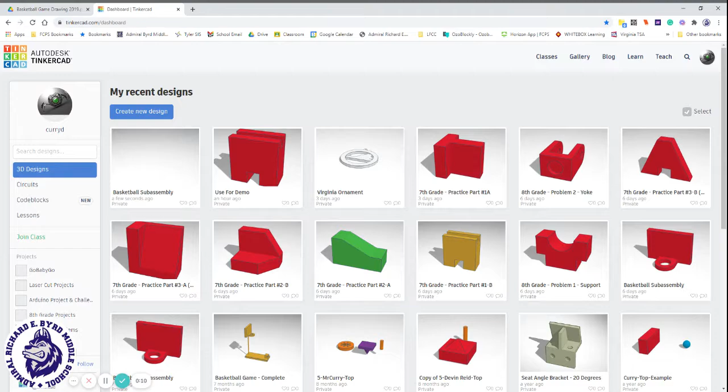Hi folks, what we're going to be designing here today is the top half of the basketball game, just to help you learn how to use Tinkercad and build those skills up for projects that we're going to be doing.

First of all, make sure you're logged into Tinkercad and that you've already joined the class by this point. If not, talk to your teacher.

We're going to create a new design. Click that. When this opens up, it's going to have some crazy name, and what we want to do is change that name. I would do that every time you first go in, and call it something logical about what you're actually making. So we're making a basketball subassembly, I'm going to call it basketball subassembly, and click out in no man's land and it'll take that. That's one of a few things I'd recommend doing every time you're just getting started.

The second thing would be, this is in millimeters, in metric. I want to change this to inches. So I'm going to go to Edit Grid, change this down to inches, and update the grid.

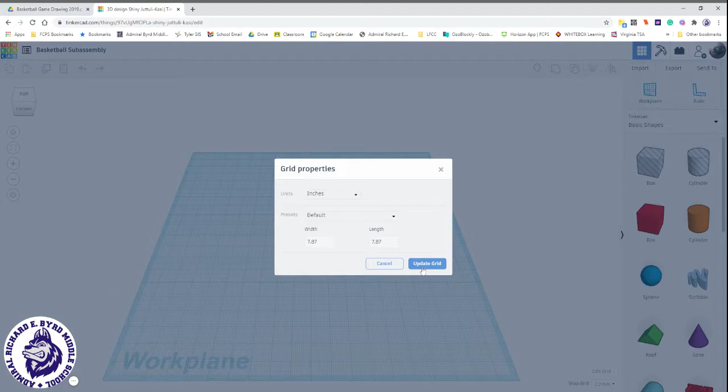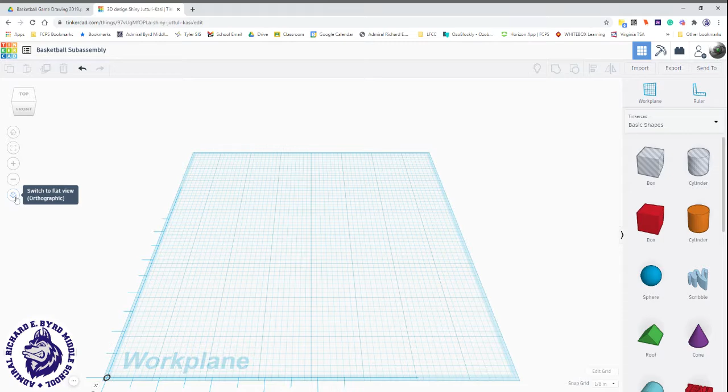Two other things I would recommend here. Ruler, top right corner - I'm going to take a ruler and drop it on the corner of my work plane. And the last thing, this bottom button in the row, is switch to flat view or orthographic view. Click on that. Here in a bit you'll see why that is going to be beneficial to us, but I would honestly recommend doing that anytime you're in there.

So now we're going to go ahead and actually start drawing. Let's take a quick look at the drawing. What we're going to do is draw the backboard and the hoop, and at the moment I like to start with the backboard, so there's only a few things we need to know. When we make this, our dimensions are going to be 3/4 by 4 by 5 3/4.

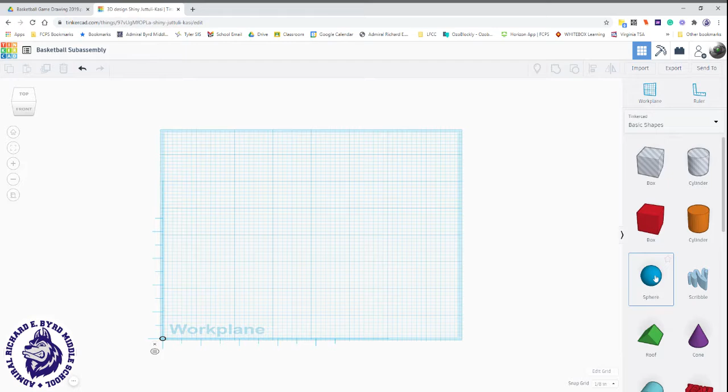So we'll want to set it up that way. I'm going to jump back to my basketball subassembly. That backboard is nothing more than a box, so from these primitives here, basic shapes, I'm going to drag out a box. And because I have the ruler here, I can see my dimensions.

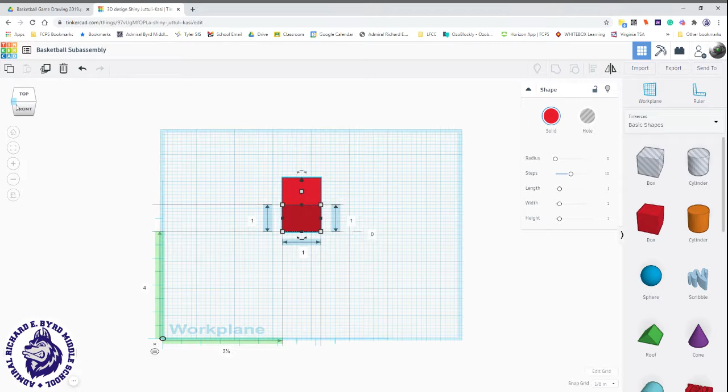Now, it's kind of hard to tell - I can tell the length across the front easily, but it's hard to tell which of these is height and which is depth. Here's a simple solution: I'm going to go to my view cube and click on the top left corner. The reason I'm going top left is, well, one second, I'll show you - if I go top left, I can see all three dimensions easily, and tell which one's height, which one's depth, and which one's my length. If I were to go to the top right corner, this is partially covered up.

So that's the only reason I'm doing the top left corner here. Sometimes, depending on how you're zoomed in, your screen size, and those type of things, you might not see dimensions in the exact order that I have mine. So please watch very carefully where those arrows - the extension lines and dimension lines - are pointing to.

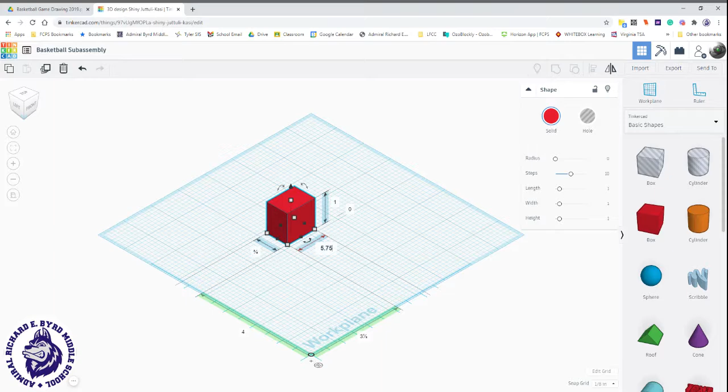First of all, our depth is 3/4. Tinkercad will not accept a fraction, so I have to go decimal - I'm going to do 0.75 and hit enter to accept it. Our length was 5 3/4, so 5.75, and enter to accept it. Now this is sliding off the screen - I can just grab it and drag it over, or use the arrow keys to move that over.

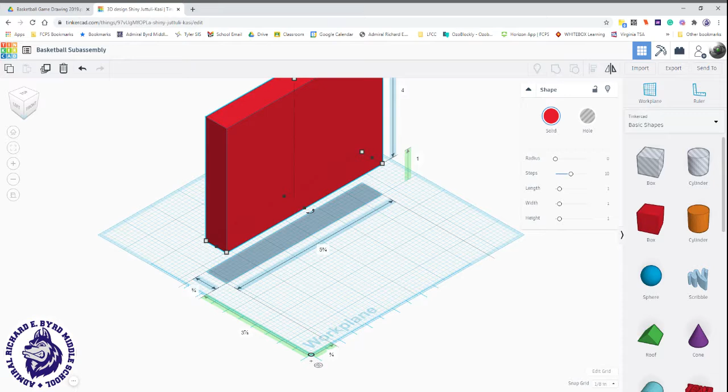And then our height - our height here is going to be 4, so just plain old 4, enter. And this 0, we don't want to do anything with that, but just to show you what it does, that will move me off of my work plane. And if something ever gets moved around off the work plane and you don't want it, the easy way to fix this is if I hit the letter D, it'll drop it back to the work plane. You'll see that here in just a little bit.

So here's the basic backboard of our game. We need to have the hoop that goes down to the bottom here, so what I'm going to do is rotate this around.

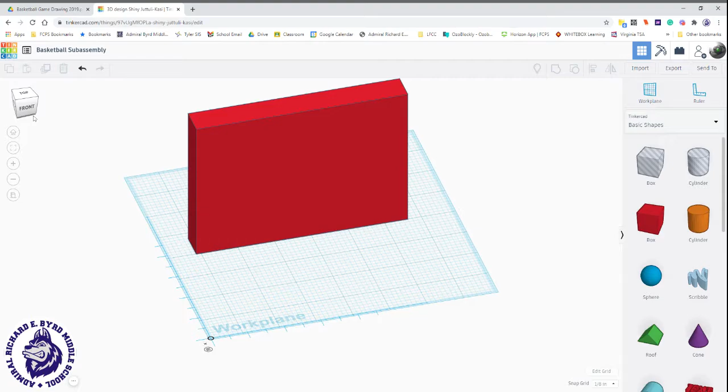I'll just drag the view cube so I can see the bottom here. If you click on the bottom, just click where you see that blue box showing up, and it's going to go to a flat view where I can see the bottom perfectly.

Now here's why I like to go to orthographic. If I were to switch to perspective, you don't need to do this, but when I go into these views, normally you can see a little bit of the height too, and it kind of makes some of the parts look funny. So that flat view really will make life easier.

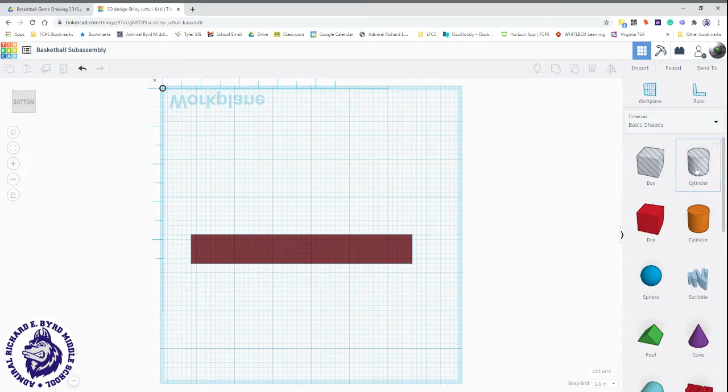I need a drill hole. Well, I don't have a drill in this program, so what we need is to bring out a cylinder, and I'm going to place it somewhere roughly in the center of my backboard here.

Anytime you're using something round, cylindrical, spherical, make sure you come in to the shape box and take the sides and run them clear up as high as they'll go. If I don't do that, what you were seeing here is it was set to 12 or 20 rather, and you can absolutely see all the little flat sides. If we were to 3D print this or laser cut this, you will see those little flat lines. So when we run this clear up to 64, it'll come out looking round and smooth.

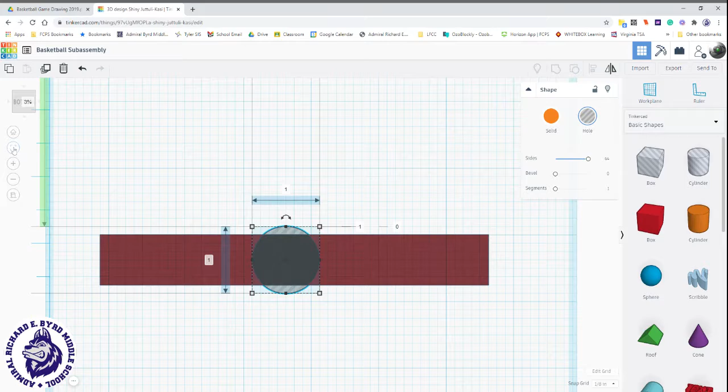Just a note, with the Chromebooks, the easiest way to zoom in and out without a mouse is to use the zoom in and out tools, or this will zoom to a selected shape, or if I have nothing selected and I hit that button, it'll zoom to show everything. With the mouse, I can roll the mouse wheel and it zooms in and out.

So we need to set the size of our circle. In higher level Autodesk programs, which Tinkercad is made by Autodesk, I could just set the diameter. Tinkercad does not have a diameter tool, so what we're going to do is just change basically our X and Y coordinates here to set our diameter.

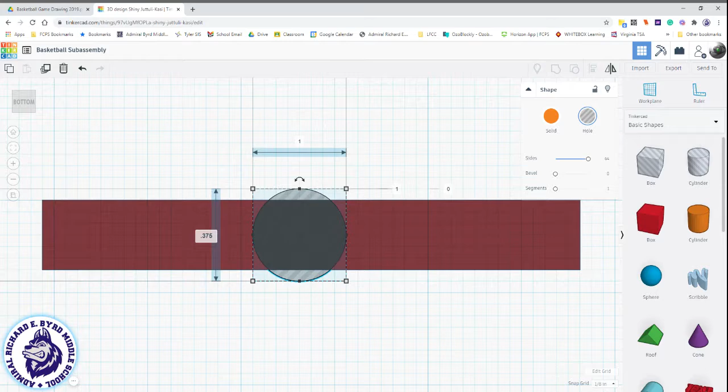The hole was 3/8 of an inch. That equates to 0.375. Enter. It's going to go to an ellipse here for a second, and that's an oval shape. That's fine. Go to the top one, 0.375. Enter. Now we have a circle.

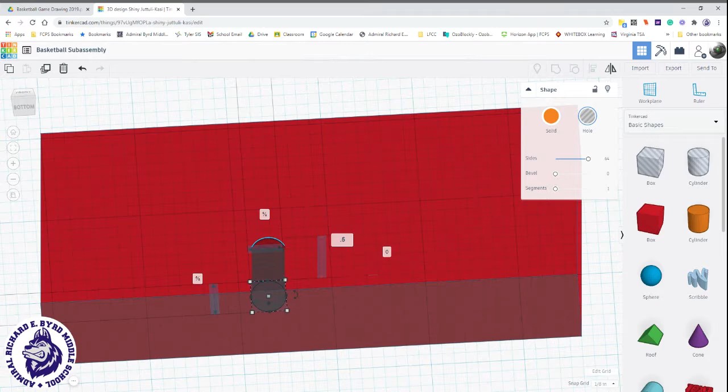Only other thing I need to do, and I'm going to tip this forward a little so you can see what's going on here, but our height for this is 1 inch. Remember, we had a 1/2 inch deep hole, so I'm going to do 0.5 there. When I hit enter, it should drop that height down. If for some reason it gets messed up and moves up or down, you've got the wrong dimension here, and you can always undo and go back and adjust things.

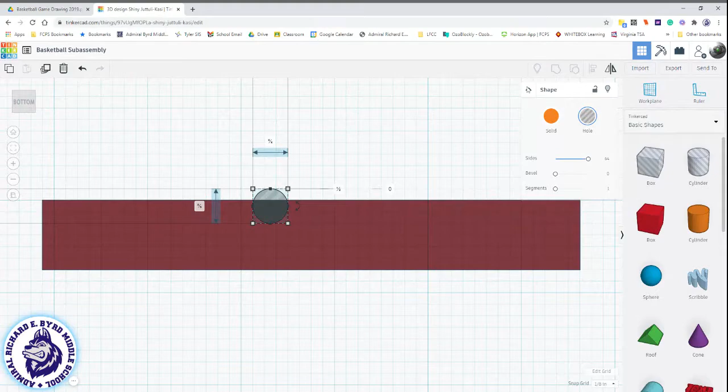So now what we need to do is center this across the backboard. To do that, I can do a number of things. I can just left click and drag a box over these things, even if it just touches both things, it'll work. Another option is I can do Control A, which selects everything. Or I can click one thing, hold Shift down, and select the other. Anyway about it, make sure you have both things selected.

Up here in the upper right, we have the Align tool. You can click the button or you can hit L, and these black dots show up. If I mouse over them, you can see exactly what's going to happen. So anytime if you're not sure which one you're trying to click, mouse over it and see where it's going to put things and see if that's what you want.

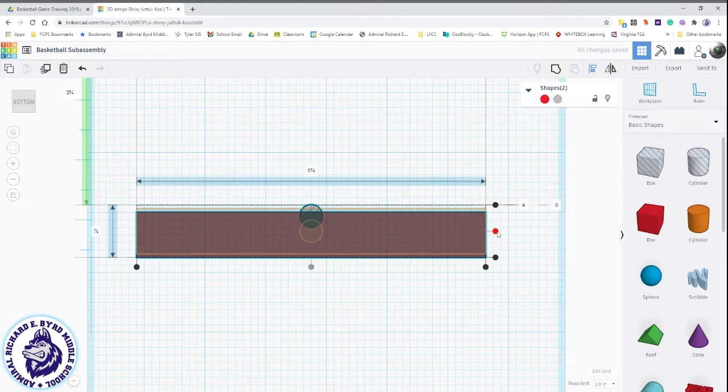So I want this hole to be right smack in the center of this whole thing. Simple enough. I'm going to hit the middle dot here, and I'm going to hit the middle dot that's going vertical, and there we have it. So now that's right smack in the center. I don't have to measure 2 7/8 or anything else.

Right now with that, and I'm going to click out of this just so I can show you, you have the hole shape. The cylinders, any shape that has a gray with the lines, is a hole.

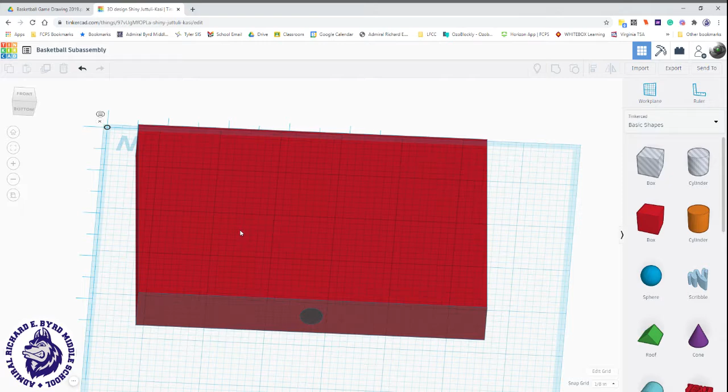We have that setting inside of the solid. It did not cut, I need to select everything again. We have a group tool up here, you can click the button or do Control G. But when I click that, and if I rotate it a bit, you can see it actually cut that hole out. So anytime you want to cut a hole in something, you have to take a hole shape, put it inside or touching a solid, and group them, and it will cut.

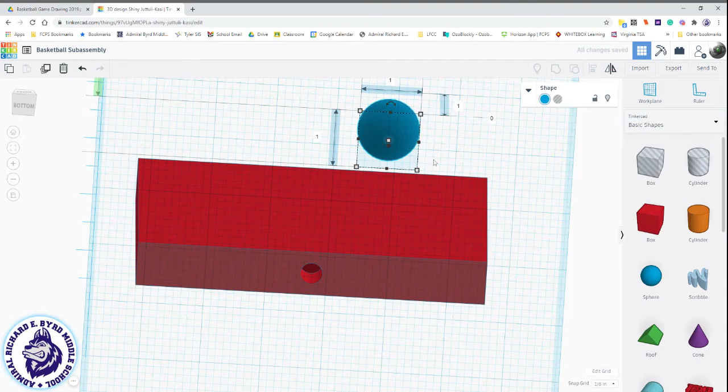I can make any shape into a hole, just to show you quickly. We don't need the sphere for anything, it's just in the shape box. I can make it a hole, I can make it a solid. That goes for anything in Tinkercad, so just so you're aware.

I click the shape color, I can change colors, but delete this out. Okay, that's our backboard. Now we need to make the hoop.

So we're gonna come over here to my drawing. My hoop is 2.5 inches by 2.5 inches and a half inch tall. However, it's not square, it's not a perfect square, it's not a perfect circle, it's kind of a combination of both. So if they don't have this shape in Tinkercad, I have to actually go and make it, and I'll show you how we're going to do that.

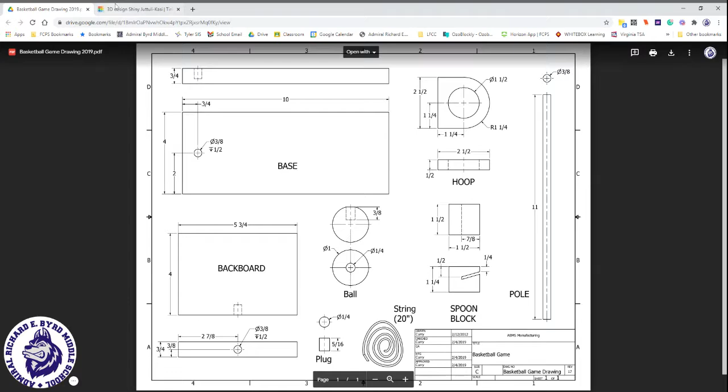To start out, I'm going to bring in a box and put it in front of my backboard. The backboard you can move out of the way if you'd like. On small screens of the Chromebook, sometimes I like to change the color of things just so it's a little easier to see what's going on, a little more contrast.

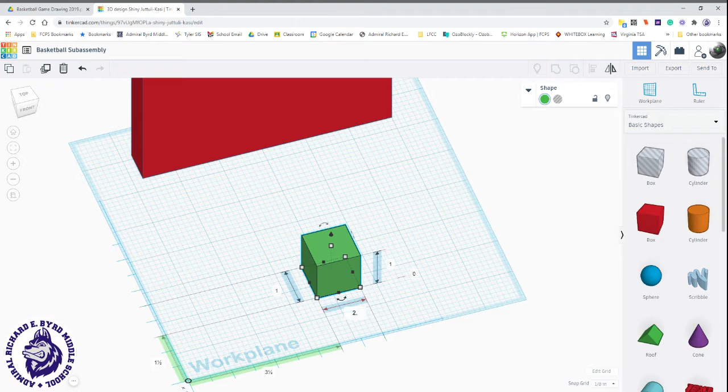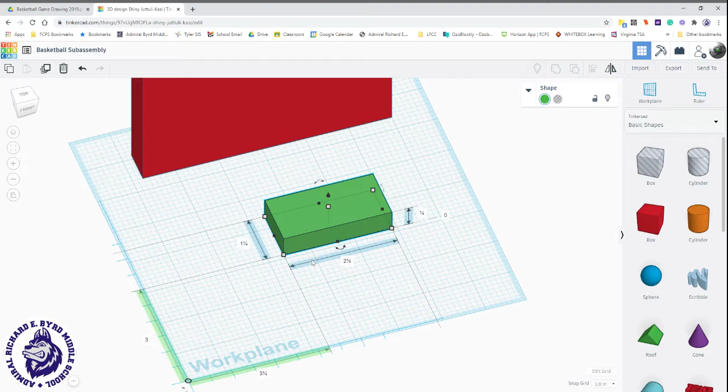Our width, the length of this thing, is going to be 2.5. Our height was a half inch, or 0.5. And because that thing is not a complete square, I'm not going to do 2.5 for my depth, I'm going to do half of that - 1 1/4, or 1.25. Make sure you have these set correctly. It should kind of resemble a domino laying on its side. It should be long, it should be half as deep as it is long, and it should be a half inch tall. If you need to rearrange those numbers, please make sure it comes out like this.

So now that I have that, I need to put the front half of this in. So we're going to use a cylinder, we want the solid. And again, if I grab the wrong one, I can make it a solid. As always, because it's round, I'm going to take my sides and run it clear up, not down. There we go, and I can put that up if I want to get it out of the way.

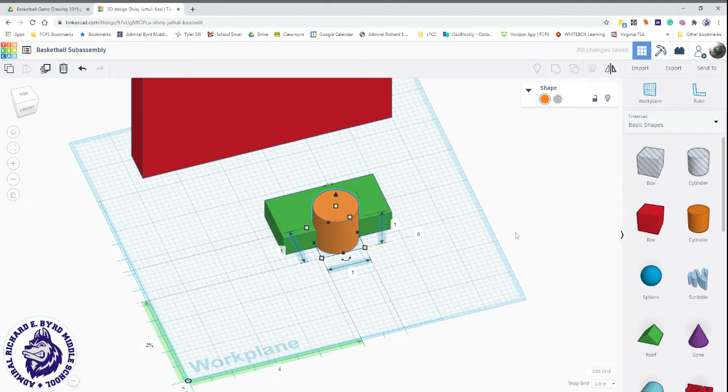So I can still see which direction's which - my height, and then my length and width, or X and Y, and height would be my Z axis here. So I'm going to set this to a height of a half inch, or 0.5.

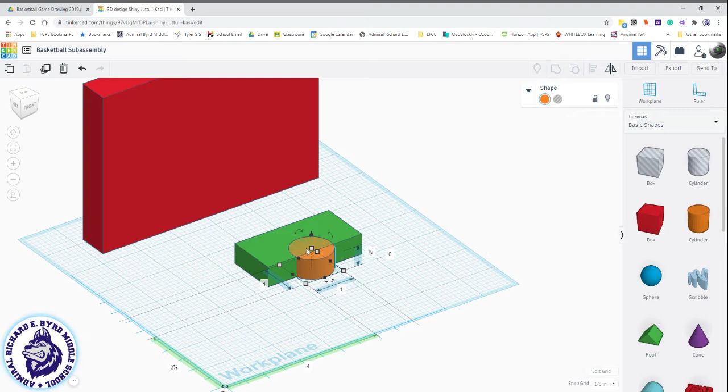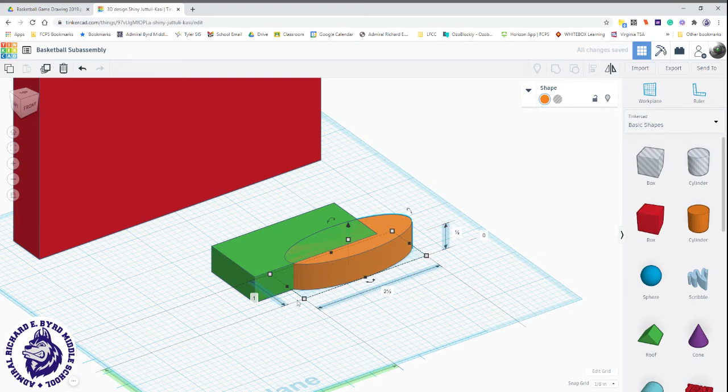Enter. These weird little marks here, that's fine, it just shows they're the exact same height and they're kind of competing for color. And again, because I do not have a diameter tool, I have to set these two to the same number, and that 0 I want to leave it be. So this is a 2.5 inch circle - click that again, 2.5, enter. This one, 2.5, enter. And you should have a half inch tall circle that is 2.5 inches in diameter.

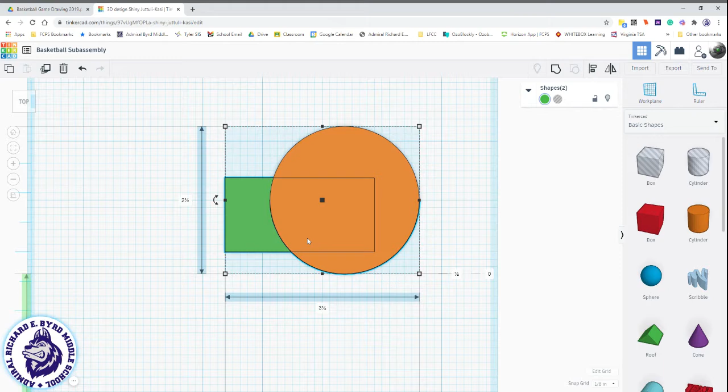At this point, what we need to do is select both things, and I went to the top view, just easier to look down on it. I need to align these, and I want it centered this way so it matches up. I do not want to center it this way because that doesn't at all look like what I want. I'm going to move this to the back.

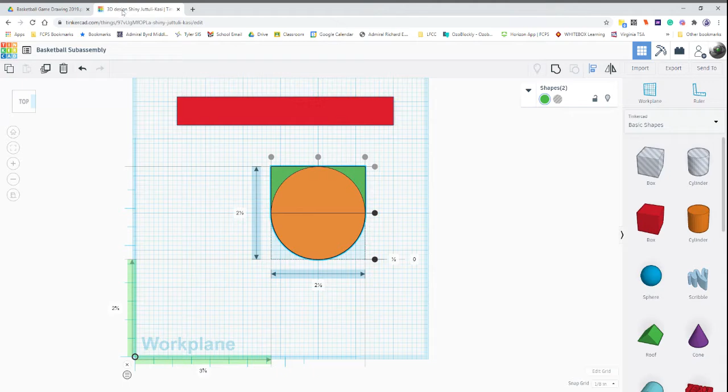The reason I'm doing that is because the flat side here is going to attach to the backboard. Otherwise, if I move that to the front, I would have to turn this completely around after I'm done. So I'm going to keep that in the back, and I'm going to group these two objects. And there is our basketball shape, hoop shape.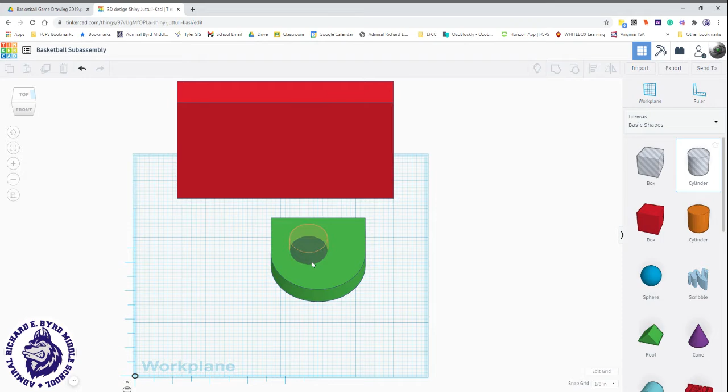Now we need to cut that hole in the center. So I'm going to bring out the hole shaped cylinder. Cylinder shaped hole, and I'm going to take the sides clear up because it's round. And I need to set my sizes. Now, again, I can't really tell which one's which here, so I'm going to go to that top left corner. Now I can see that's my height, this is my Z, my X, and my Y.

This is going to be a hole that cuts completely through this thing, so the fact that it's 1 inch tall doesn't matter. I could change it to a half inch, or even 100 inches, and it's still going to cut straight through it, so it doesn't really matter.

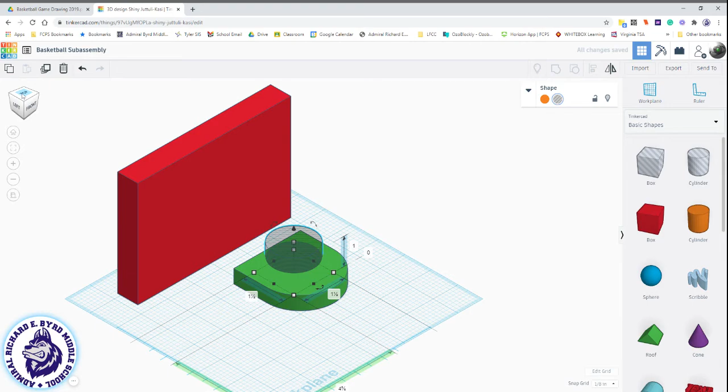But the hole in here is 1.5 inches diameter. So for my X and Y, I'll enter 1.5. If I go to my top view, there we have our hole. We just need to place it, and you can probably guess here.

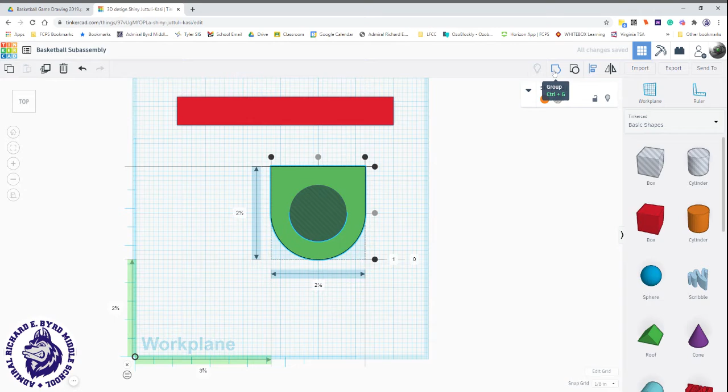So I have the hole selected. I'm just going to hold shift down and click on the green part, so I have the solid selected too. When I have both, I'll use the align tool again, and we want this right in the center, so I'll click the center button this way, and the center button this way, and go ahead and group these. If I go back to a different view, we can see I have both parts all set up.

So I have the hole down in here, I have my hoop all made and set up. Now we just need to attach the two parts together. So to do this, once again we're going to select both. I could do this with Control A, because everything here is getting selected.

And once again, the align tool is a wonderful tool, we're going to be using that. And actually, before I do that, let me back up—workplanes are also a wonderful tool. Here's how we can connect two things and make sure they're absolutely connected without worrying that there's any microscopic gap in between them. We're going to go to workplane, or hit W on your keyboard.

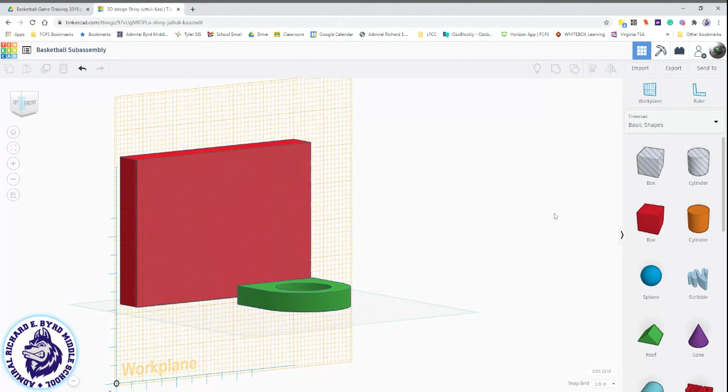You'll see it follow the mouse. So I clicked on it and let go, I don't click and hold. I'm going to put this on the backboard—just click on there, and my workplane went from the ground here up to the backboard. So what that allows for is if I were to bring out shapes, it would put it on that workplane. Of course I don't want to do that, so I'm going to delete that.

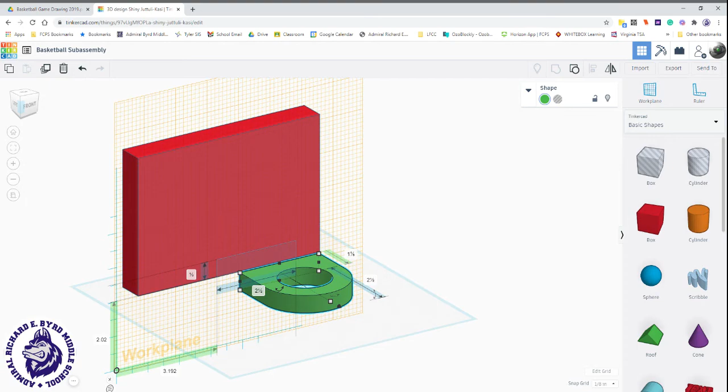But here's another benefit of those workplanes. I want the hoop to be attached to the backboard. So what I'm going to do here is click the hoop, and on the keyboard hit the letter D, as in dog. What that will do is a drop command. When I do that, it drops this down, and now it is 100% guaranteed attached just how we want it. It's not lined up right, but it's attached, and we'll be good there.

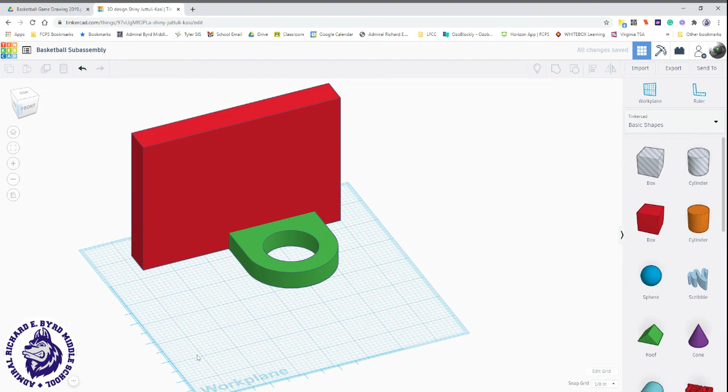So to make this less messy, I'm going to take a workplane and just drop it out of white space, and it'll go back to normal. Now we're going to go ahead and align these two, so I want to select everything, and I'm going to tilt this a bit just to show you.

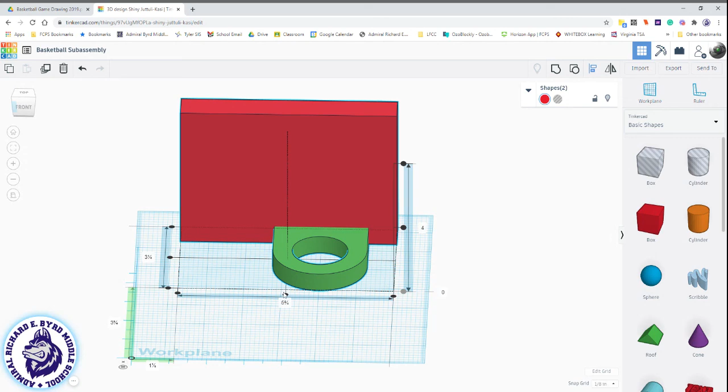When I hit that align tool, I have align options for X, Y, and Z axes. For this one, I don't want to move it up or down, and I don't want to move it forward or backward, because we just lined it up where we want it. The only thing I want to do is center it across that X-axis. So I'm just going to come in here to the center dot and click it. You should have something that looks exactly like this.

And we're going to group this thing together so it becomes one piece. And what we should see is our 4 inches tall, 5 and 3/4 long here, and 3 and 1/4 deep.

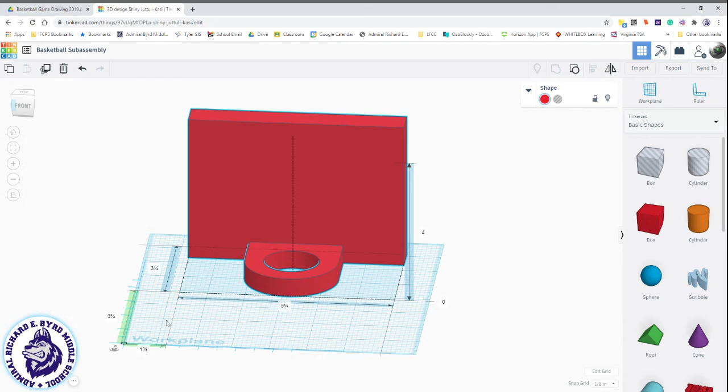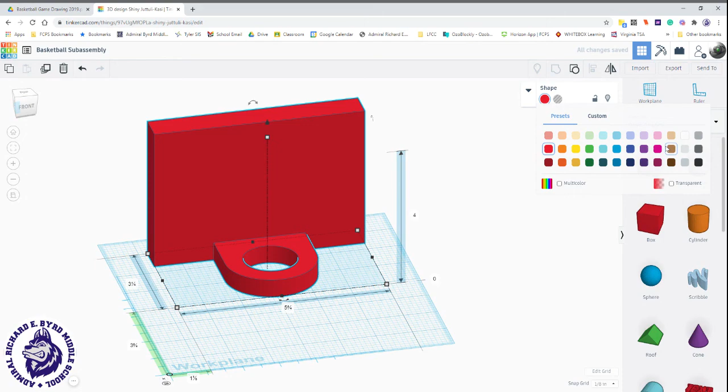One last thing that's not really that important—it has no bearing on 3D printing or laser cutting or anything, but just because you can, you can go in and change colors and make these all sorts of things. If I wanted different colors on both pieces, I could do multicolor, or make it transparent, or whatever color I want. But I like to go with kind of a wood color, because we make this out of wood. That's just me.

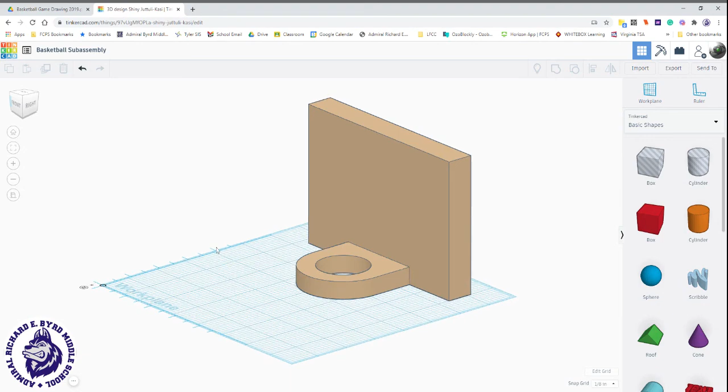And there you have it, folks, that is our basketball subassembly. And the steps you use for that, you'll be able to use to make a bunch of different projects in class.